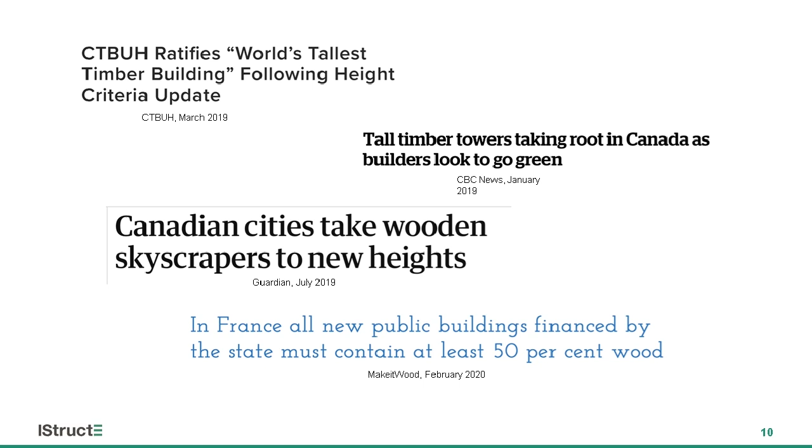Unfortunately, I'm not going to have all of these answers for you today, but hopefully will offer you some really useful insights from my travels to these regions.

So moving on to tall timber in North America. I'm going to start off by going back to basics.

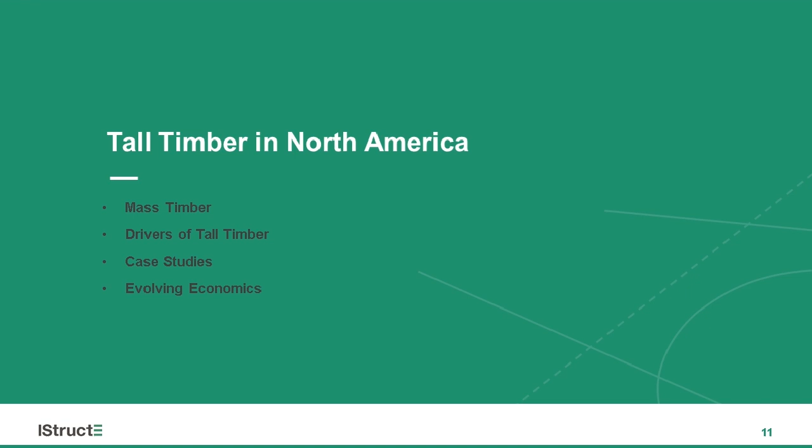What is mass timber? Well, this is a collective term for engineered timber products such as cross-laminated timber, CLT, glulam, or dowel-laminated timber, DLT. These are effectively solid timber elements comprised of sawn timber that are glued or mechanically fixed together to create a stronger, stiffer element. And these are the material systems that I'm going to be focusing my research on.

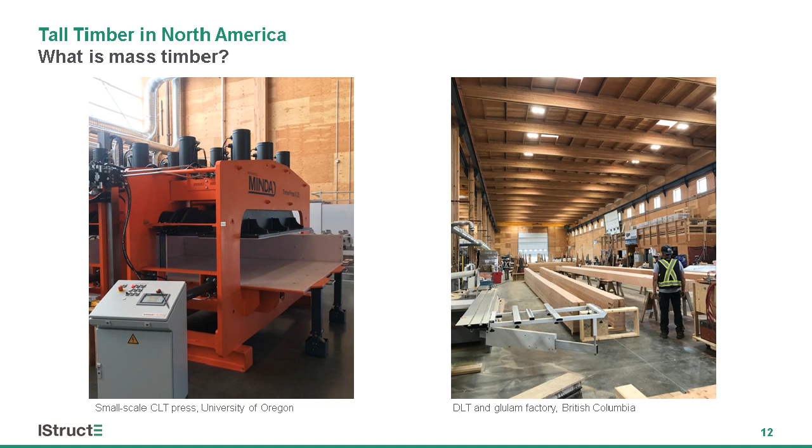So what's going on in North America? In December 2018, the International Code Council, ICC, introduced changes to the upcoming 2021 International Building Code, allowing the prescriptive design of mass timber buildings up to 18 stories without acquiring special permission from the underlying authority. Before this, there was no guidance for mass timber buildings above 6 stories, and any proposed building had to undergo a performance-based alternative approval process. So what this offers is a relatively straightforward route to compliance for these types of buildings.

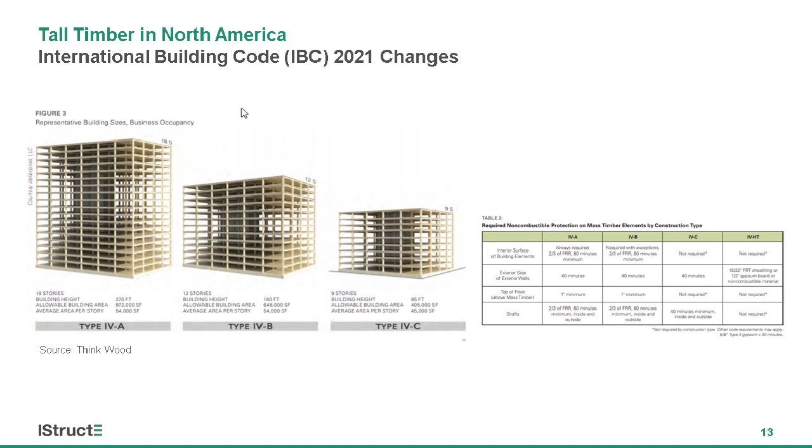And this has already been adopted in parts of North America, especially the Pacific Northwest.

What are the drivers for building taller in timber? Well, there are certain economic reasons. Canada effectively has an unlimited supply of timber, and through sustainable management, its rate of deforestation has been close to zero for the past 30 years. And the hope is that this surge in timber usage will help catalyze the lumber industry, thereby boosting local rural economies.

Carbon: Canada and lots of US cities have pledged to be net zero by 2040 or 2050. Thereby, the thought is that using sustainable forestry and mass timber usage in construction, this will then act as an agent to help achieve this.

And then urbanization. Many West Coast American cities are run by socially liberal parties who are looking to use cheaper local materials to help improve affordability and boost social housing projects in a sustainable way.

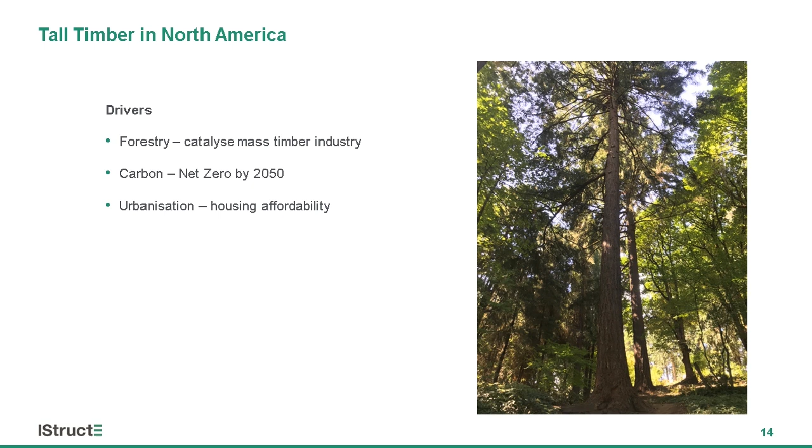So the foundation of my research was meeting with various engineers, architects, contractors, and researchers to learn about the technical aspects of tall timber. And a list of case studies, a full list of building case studies, is contained within the report. However, I'm going to focus this presentation on 3 today, highlighting the pertinent points and hopefully giving you guys a quick flavour of what is going on out there.

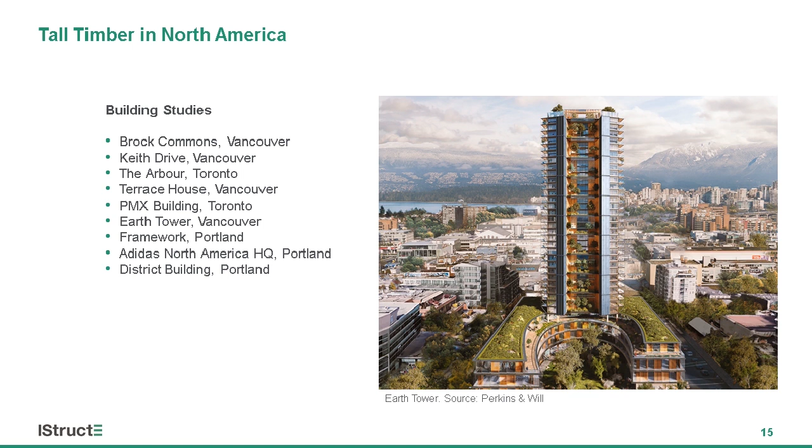So, Brock Commons is one of the most important tall timber structures over in Canada. It was born out of a research program launched by the Natural Resources of Canada, NRCan, to demonstrate the legitimacy of tall wood structures. It's what we call a hybrid building with stability provided by reinforced concrete cores.

It's a student residential building with the grid set to suit the width of the CLT panels at around 2.4 meters. And it's essentially a flat slab analogous structure with the CLT spanning in 2 directions between point supports, which are glulam columns.

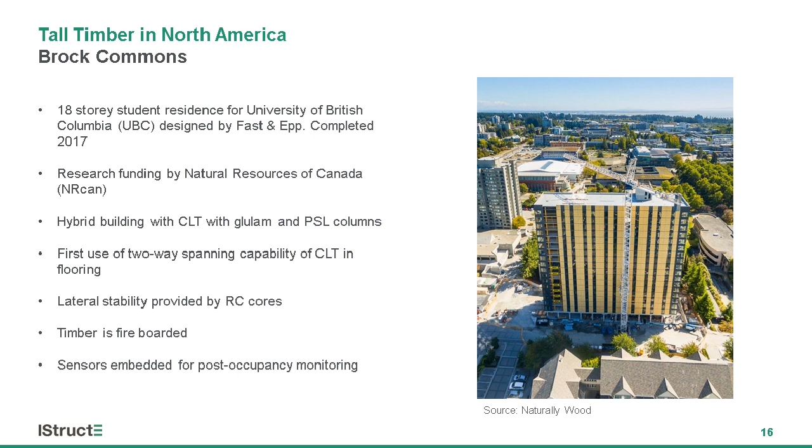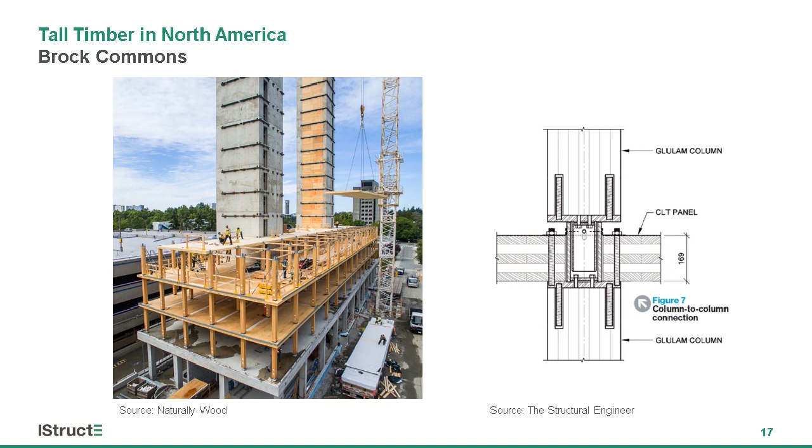So in this next slide, you can see it in a bit more detail, and you can see there's a really neat column-to-column detail, which helps reduce the shrinkage-induced stresses in the panel around the point of support and helps isolate the vertical load.

So the next building is called the PMX Building, which is formed from the Sidewalk Labs development of Toronto Quayside. Sidewalk Labs are the urban development arm of Alphabet, who also own Google.

It's a prototype mass timber building formed of a catalogue of different components that make up this 35-storey building. It's what we call an all-timber building, with all the main structural elements made out of mass timber. And you will note that this is that quite a few projects on the case study list pride themselves on this fact. The columns are pretty massive, in contrast to Brock Commons, and they're exposed and designed for charring.

The stability is provided by an LVL diagrid, but it is also the first proposed use of a tuned mass damper for a timber building, which is required because the building is just so lightweight. There are lots of high-level studies that have gone on to work out the effect that this tuned mass damper has on the dynamics of the building, as the effects are largely unknown up to this point.

Unfortunately, the Toronto Quayside plans have gone on hold. However, I think this is a really exciting case study.

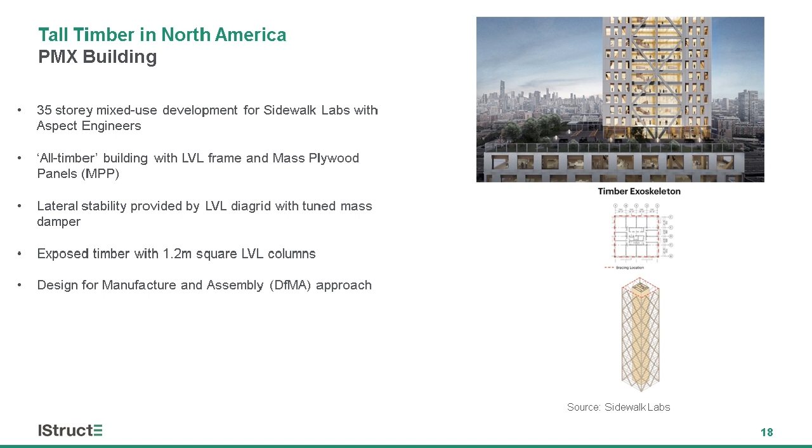And also, the growth in mass timber isn't just synonymous with tall buildings, but also different typologies, like this commercial development for Adidas, forming the new North American headquarters in Portland. It's a collection of 3 to 5-storey buildings on a 45,000 square meter development, so a huge site.

I was lucky enough to visit it on site while it was being built, and you can see the interior space looking really fantastic. It's got a really nice typology with glulam beams that span between columns, offering a double shear connection, and a rib cassette floor that spans in a different direction. It allows you to change the facade as you go up the building, or for the structure to cantilever in both directions.

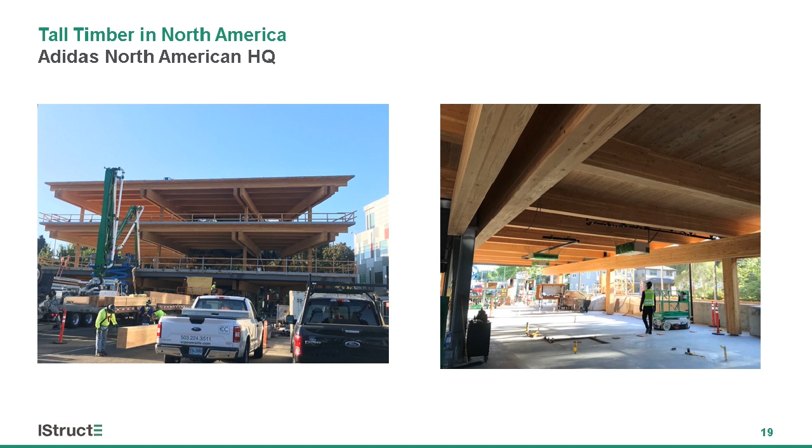So just moving on to the evolving economic agenda. Mass timber production is still very much in its infancy in North America. There was massive growth last year, however there are still only a handful of projects, and there is certainly a lack of experience and expertise in constructing and contracting mass timber buildings.

There are only 7 CLT factories in the States at the time that I visited, compared to around 30 in Europe. However, there's a new wave of finance and investment moving into this area. For instance, 90% of certain forest in Canada is publicly owned, however it's leased to only 3 companies. What these companies are doing is building mass timber factories to help vertically integrate their business, and the hope is that they would be the only ones to supply in these different regions.

And there was also lots of disruption by tech companies. So I mentioned Sidewalk Labs. There's also a company called Katerra, who were last year valued at $4 billion, who are moving into this market and sense a big opportunity here.

However, the impact on timber supply is likely to be minimal. Oregon, which is more or less the same size as the UK, has 50% forestry coverage compared to about 10% in the UK, and lots of these trees are species that are widely available for CLT production.

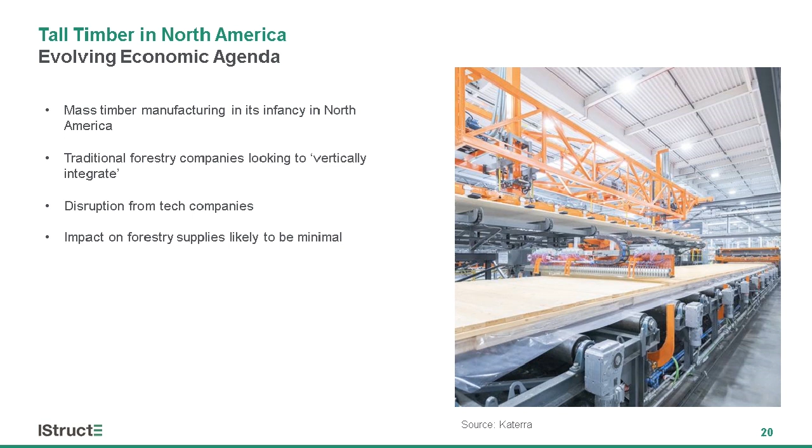So moving on to Norway. The reason I went there was to see the tallest timber building in the world at 85 meters, which is Mjøstårnet. It has an exposed mass timber frame formed of glulam columns and a glulam diagrid that provides stability around the perimeter of the building. Some of these elements are 1.5 meters long at the base. It has a core formed of CLT, but these do not provide stability.

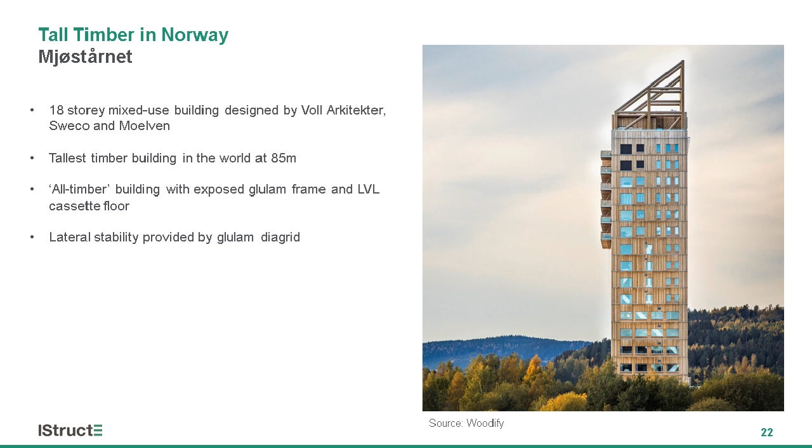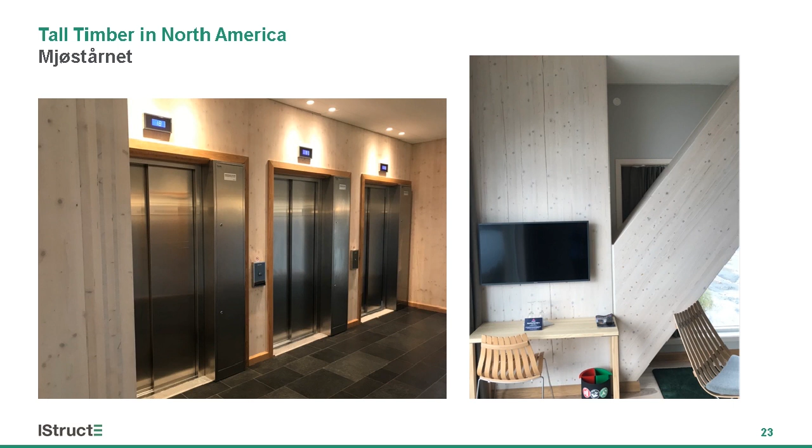Here are some photos from the interior. Lots of dynamic analyses went into the design because it was so lightweight, and actually the top 7 floors needed to be precast concrete in order to provide that dead weight and limit the lateral response or sway of the building. Having been to the top, you can actually feel the building move, and this is backed up by data from an accelerometer that they installed at the top.

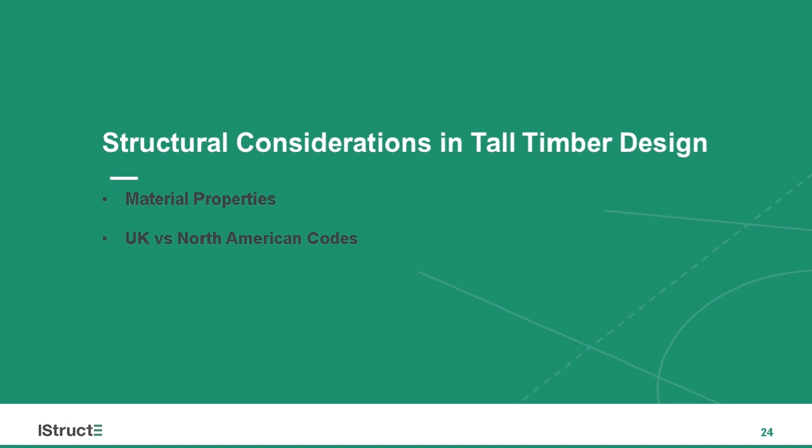I've put together a list of considerations that affect tall timber buildings from my research, and these are split into the vertical and lateral design. Essentially, many of the design issues associated with tall timber buildings are just exacerbated at greater heights, and certain issues to do with differential movement between differing material systems need to be carefully thought about, especially the short-term elastic case.

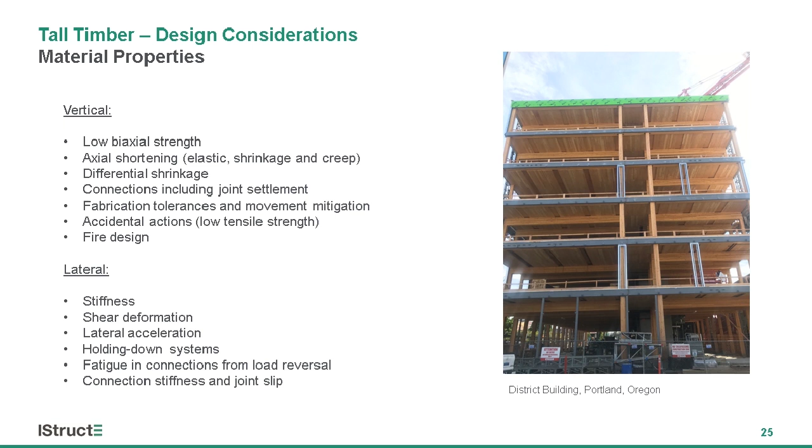I've also provided a summary of the core properties between main materials, which I think is useful to highlight 2 points. I'm sorry if this is going to sound extremely basic, but I think it is a helpful reminder. Firstly, timber is less stiff, so mass timber elements are around 20 times less stiff than steel, and shear deformation can cause a big issue with tall timber buildings.

The second thing is that timber is less strong. So certainly if you have an element that has a lot of bending, this can result in significantly larger elements than you would get with concrete and steel buildings. So although you can use timber in tall buildings, you're just going to use a lot more material, and certainly at the early stage of a project, you need to be really careful with coordinating this with the architect and the client.

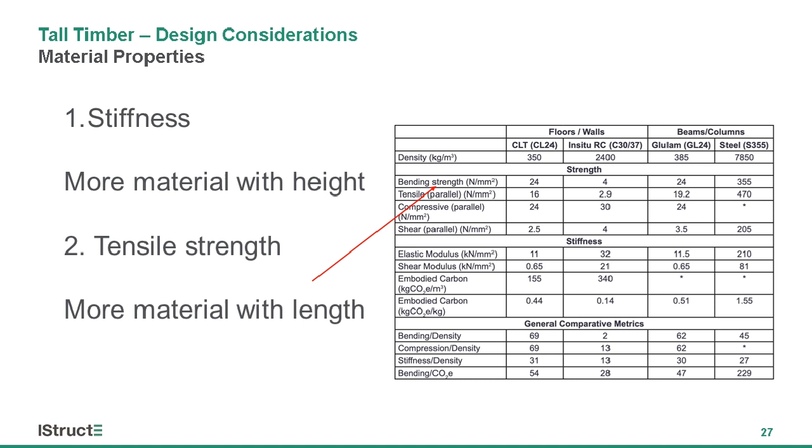So the next slide is a very broad overview of the European or UK codes compared to North America. This is fairly generalized, but I wanted to highlight 3 different things.

From a regulatory point of view, in the UK, on the whole, we can design any building in any material in any way we like. We just have to demonstrate it's suitable, whereas in North America, things are a bit more prescriptive.

In terms of the design procedure, in the UK, CLT is deemed an innovative product, and therefore the design procedure is set by an ETA process and can vary between suppliers. In comparison, in the States, there is the PRG 320 code, which has helped to unify the design of CLT, so the requirements and design procedure are all in one document.

And then fire design - well, in Europe, it's not particularly straightforward, and again, it can vary between the supplier. In contrast, in North America, it's slightly easier and follows similar principles to Eurocode. However, it potentially lacks the development that the European codes are looking at currently, which I'll move on to now.

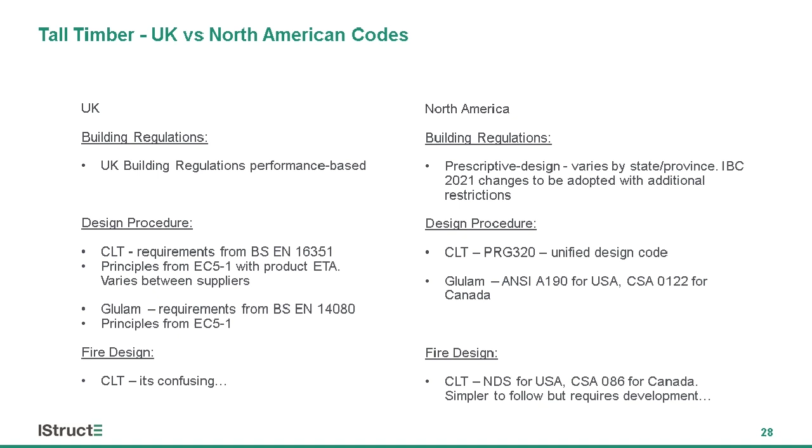At the same time as the IBC changes were introduced at the back end of 2018, the UK introduced a prescriptive change to the building regulations, disallowing the use of timber in the external wall build-up above 6 stories for residential buildings. So clearly a dichotomy exists between North America and the current direction of UK regulations.

This is probably the most significant topic for tall timber building design, and unfortunately we haven't got enough time to go into depth here, nor am I from a fire engineering background. So for anyone interested in learning more, I'd highly recommend reviewing information put out by the University of Edinburgh team recently - people such as Angus Law, Luke Bisby, Danny Hopkin - who have provided really good insight into these issues and concerns raised by the engineering research community.

What I'm going to do here is present a very high-level comparison of two contrasting regions, and my report will go into a bit more detail about this.

The first difference is that many issues were identified a few years ago with delamination of CLT due to heat in the adhesive, which can result in cyclic burning in compartments. PRG 320 tries to identify and exclude delamination with the specification of more heat-resistant adhesives. So although this can't be eliminated, it can be delayed.

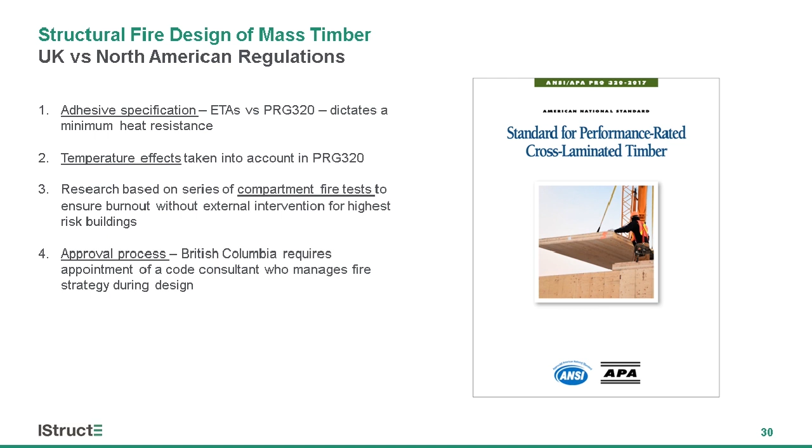From a regulatory point of view, although there are a variety of local, state, federal codes and approval processes, the prescriptive nature helps to clarify some ambiguity that maybe exists in European codes. Whilst also in British Columbia, there is also an alternative approval process. For instance, also in Vancouver, a code consultant is a mandatory design member - someone from a technical background who helps to manage the fire strategy during the design process.

Moving on to the recommendations for the UK, I won't go through them in detail here, but more on this can be read within my report. The main point is that there is now a specialist interest group within the UK through the Structural Timber Association, STA. They are dedicated to the design approval process of mass timber structures in medium and high risk building scenarios, and that's run by Danny Hopkin. I think some really positive things will come from that, hopefully sooner rather than later.

The important point is that there are risks with exposing mass timber that you don't get with concrete. So if you're unsure, advise encapsulation with fireboard following the recommendations of the supplier, and seek advice from a specialist in fire engineering of mass timber elements.

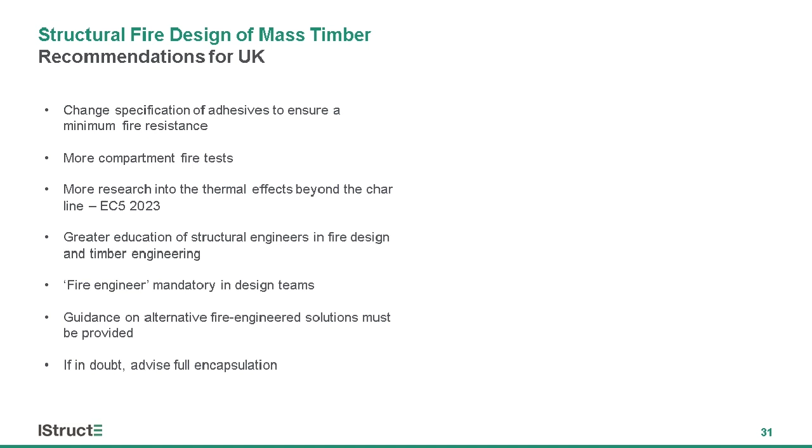Moving on to the conclusions - there was a recasting of the boundaries in the way we design and use timber, certainly in North America. We should consider new typologies for mass timber buildings that have traditionally just been steel and concrete framed. And we always need to consider the risks with structural fire design when we're exposing timber.

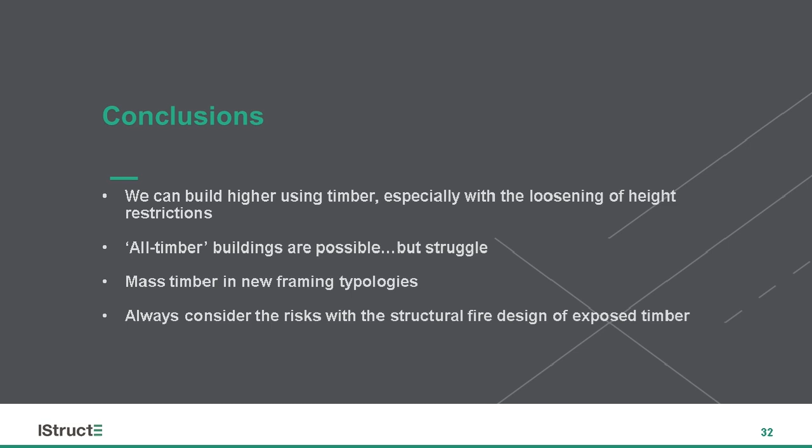The next couple of slides are rehashed from a brilliant lecture by Alan Dowdall at Ramboll, so full credit to him, but I thought he made a really clear and important point. And that is, what do we mean by tall? Is it total building height, which may be a building like Burj Khalifa, or is it the slenderness of a structure? So just for comparison, this is where Mjøstårnet sits.

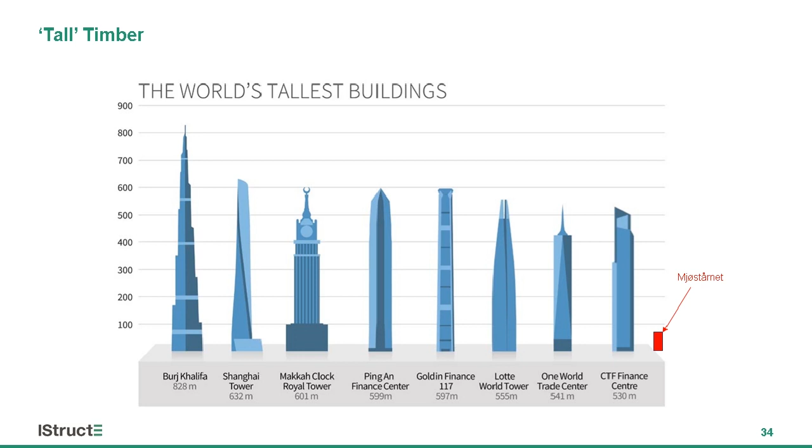Clearly right at the bottom end of the scale. So I think we need to be thinking about materials in different ways.

So just finally, I believe that tall timber is a phenomenon. I think it's one that is likely to be short-lived, but that does not take away from viewing these projects as demonstrations of the capability of mass timber, and them acting as catalysts to encourage the wider acceptance of timber buildings, especially with the public.

The real win for mass timber is medium rise, and timber should be taking a greater share of this market. I often hear people say all housing must be built from CLT. I think this is wrong. Don't think it's too simple to design a timber joist or a cassette floor or a stud frame. If it doesn't need glue, then don't design with it.

Half of the embodied carbon in CLT is through the production of the adhesive. So just to back that up, 90% of housing in North America is timber stud frame, and there are really obvious reasons why from a cost and carbon perspective. And just remember, 99% of the existing building stock in the UK is under 6 stories. So we should be using more timber for these low-rise buildings.

Finally, just referring back to the material properties sections, we need to use the right material in the right way. So the way forward for tall timber structures could be with hybrid buildings - potentially looking at a steel frame with timber floors, or maybe even a timber frame with concrete cores providing stability like Brock Commons. These will offer the lowest embodied carbon options.